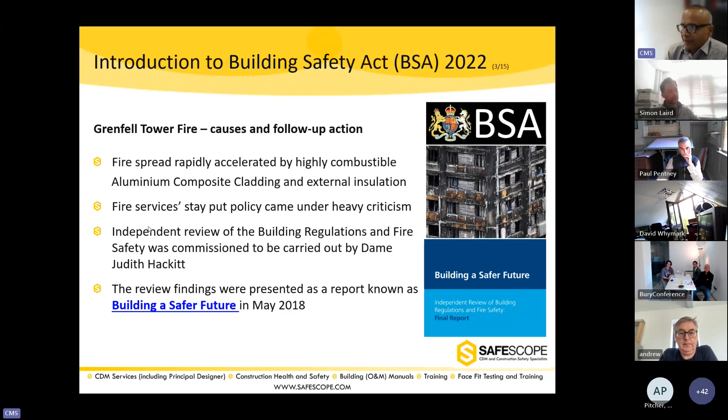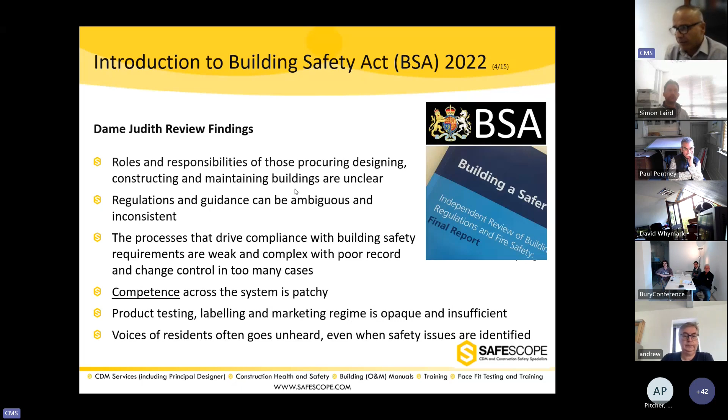The findings of the Hackitt review are important for us to understand, as all these new changes are based on them. She said roles and responsibilities of those procuring, designing, constructing and maintaining buildings are unclear - there's a problem in terms of who is doing what on the building project. Regulations and guidance can be ambiguous and inconsistent. The processes that drive compliance with building safety requirements are weak and complex, with poor record and change control in too many cases. Competence across the system is very patchy. Product labeling is opaque and insufficient. And for high-rise buildings, the voice of residents often goes unheard.

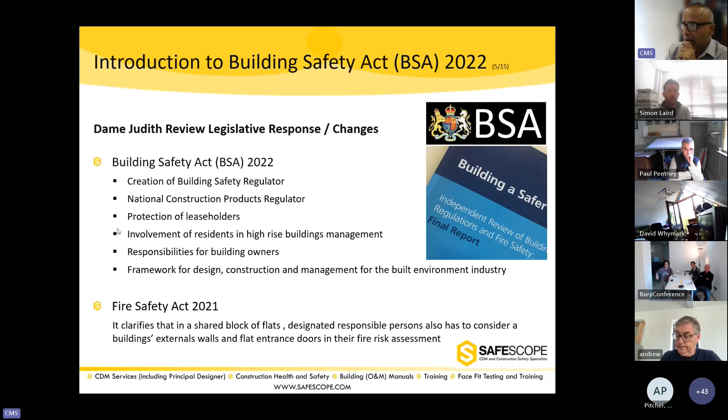There's a new Fire Safety Act 2021, which clarifies in shared blocks of flats who the designated person is. They are responsible for external walls and the flat entrance doors in their fire risk assessment. Now, it's a huge piece of legislation. We'll try to filter it down to the purpose, the new duties and roles, very quickly.

There have been changes to building regulations and creation of new roles and duty roles. There have been changes to construction products and creation of the National Construction Products Regulator, and changes to the Defective Premises Act as well. There are 6 parts to the regulation and 9 schedules.

Part 1 is the introduction. Part 2 is the regulator and functions, i.e. the building safety regulator. Part 3 brings changes, amends the Building Act 1984, and resultantly changes the building regulations as well, to do with the design and construction of building work. Part 4 is about high-rise buildings and the requirements in occupation. Part 5 of the Building Safety Act is about provisions for safety and standards.

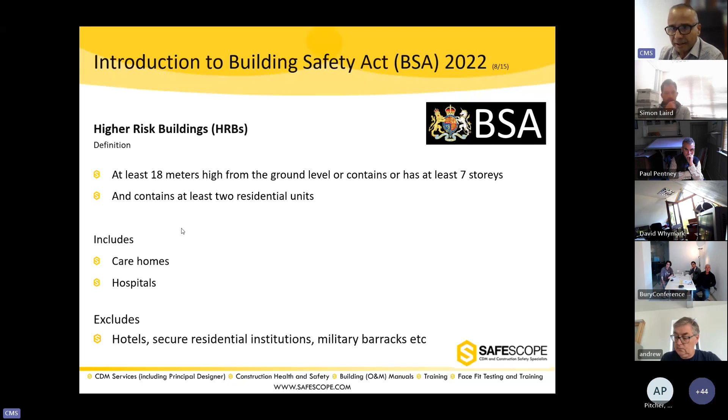It excludes hotels, secure residential institutions, military barracks, etc. So a purely commercial building without any residential unit will not be called a high-risk building, and these regulations which apply to high-risk buildings won't apply to it.

There are some diagrams showing how to measure 18 meters, measured from the lowest part of the ground floor if it's on sloping ground, to the last floor level — that's called the 18 meters. The basement floors are not included in the 18-meter measurement.

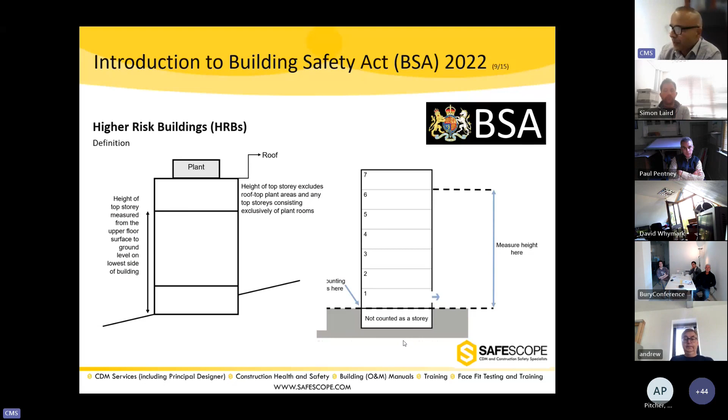Now, what the Building Safety Act does is create a number of different regulations. It creates the high-risk building regulations, description and supplementary provision, etc. I'm not going to go through the whole list, but it gives you an idea of how significant and huge the Building Safety Act is.

For example, the High-Risk Buildings Management of Safety Risks England Regulations, etc. And there's one down there that hasn't come into action yet, which we are expecting shortly.

It also modifies, which is more relevant to us, the Building Act 1984, which resultantly alters, amends and modifies the Building Regulations 2010. It also creates the Building Regulation Amendment Regulation 2023, which is very important for us because that's the one which will trigger all these new roles on building projects, and also creates the Higher Risk Building Procedures Regulation 2023.

The Building Safety Act also modifies the Regulatory Reform Fire Safety Order 2005, with some changes to it, and also creates the Fire Safety England Regulations 2022. You can imagine how many different sets of regulations have come out, changed, or been newly created as a result of the Building Safety Act.

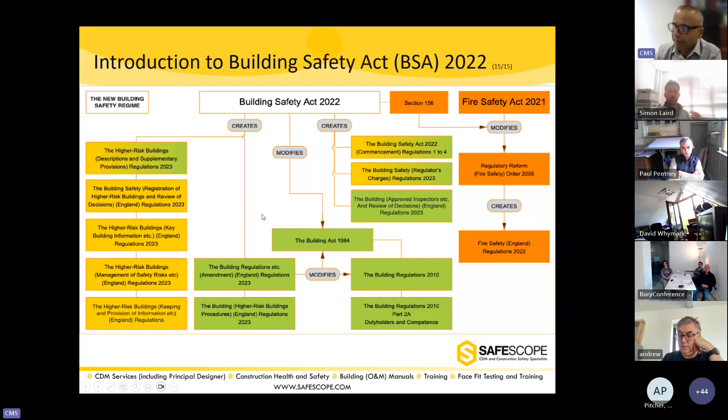Now, what are the new roles and duty holders that have come into place? Under the Building Safety Act, from 1st of October 2023 - a few days have already passed since last Sunday - new roles have been created: client, designers, principal designer, principal contractor, and contractors. Surprisingly, those are the same roles we already have under the CDM regulations. So effectively, they've created a new set of duty holders sitting parallel to the CDM regulations.

The client will now have duties under the Building Safety Act. Designers, all designers involved in a project, will have duties under the Building Safety Act. There's now a need to appoint a principal designer under the Building Safety Act as well. So there will be two principal designers - one under CDM regulations and one under the Building Safety Act, because they're two different things really. A principal contractor appointed under CDM 2015 will have those duties, but there's also another set of requirements on principal contractors under the Building Safety Act. Contractors will have duties under CDM regulation, but also now under the Building Safety Act.

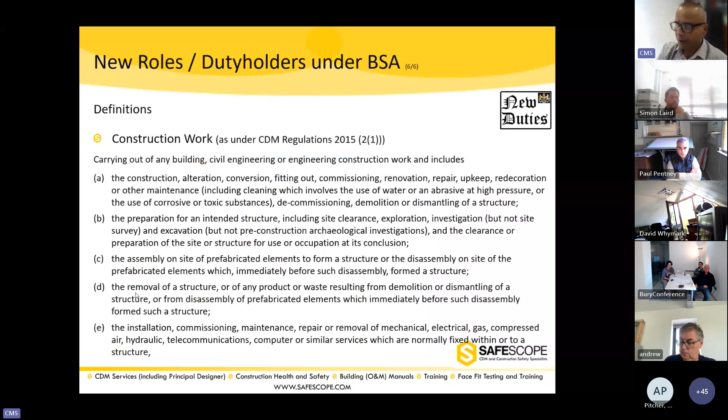So the requirements or the definitions are different, bear that in mind. That creates a difference as well. Now, what are the main requirements under the new rules? I hope I've cleared up the difference between the two. If there's any quick question on these differences, please let me know now. What I'm trying to say is to clearly map out how these two sets of regulations sit together.

The impression is that there will be a principal designer, and now they'll be looking after the Building Safety Act as well. It's not as simple as that. The roles are different, the focus is different, and the competency requirements are different. The definition is different. Where CDM may apply on a project, the Building Safety Act requirements may not apply - you see the difference, because the building work definition is narrower. Where building regulations or the Building Safety Act and the building regulations apply, CDM will apply, because CDM has a much broader definition. So if CDM applies to a project, it doesn't mean Building Safety Act requirements will apply. However, if Building Safety Act requirements apply to a project, then almost 99% of the time, CDM requirements will apply to that project as well.

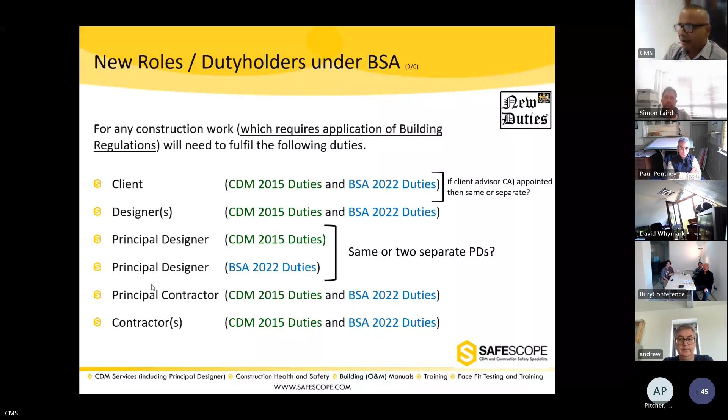Okay, is that okay? Can we move forward now? Yeah, I'll take it as a yes. Now, what are the main requirements under the Building Safety Act?

We'll go one by one, and I'll explain each a little bit later. I'll keep highlighting the words which are important for us to understand in order to decipher the Building Safety Act requirements. The Act applies to all building work - I'll keep using the word building work, not construction work, as there's a difference I explained. All building work projects, regardless of size and duration, including higher risk buildings which we defined earlier, now fall under these new requirements and will require the fulfillment of client, designer, principal contractor, and contractor duties. So any building work will have these duty holder roles applied to it, and I'll explain how they apply in different scenarios.

Principal designer and principal contractor appointments: all building work projects, regardless of size and duration, which involve more than one contractor - now you'll see the parallels with CDM. The way this has been structured is almost identical, I'm using the word almost, it's not exactly identical, but almost identical to CDM arrangements. So any project which involves more than one contractor will require the appointment of a principal designer and principal contractor by the client under the Building Safety Act, which is in parallel to, or in addition to, the CDM requirements.

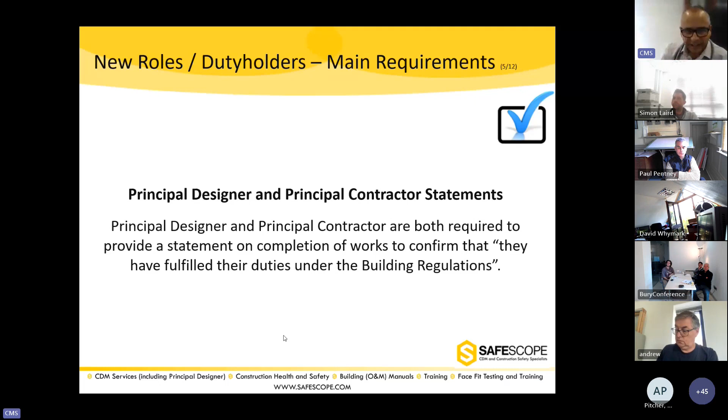Or to the client: Mr. Client, give us your evidence. How did you sign up a statement to say that all building work requirements, or building regulation requirements, have been completed? Show us how you've done it. And that would be very difficult now.

Now, domestic client projects - there are provisions on domestic client projects, and I'll come to that, including the definition of domestic client project, which is the same as under CDM regulations. Again, most, not all, of the client duties under the building regulations will pass on by default to the appointed principal contractor or the contractor.

There are similarities to CDM regulations. Under CDM, if it's a domestic client project, the client duties pass on to the principal contractor or the contractor, and all duties pass on. Under the building regulations, not all duties pass on. Most of them do, but there are still some duties that remain with that domestic client as well. Again, that's a change compared to CDM regulations.

So who are the domestic client? A domestic client is a client for whom a project is being carried out which is not in the course or furtherance of a business of that client, i.e. the work is being done purely for their own residential use or for their immediate family members. That's the definition used in CDM regulations, and the same definition applies to this regulation as well.

But again, bear in mind that not all duties pass on from the client. So the client still retains some of those duties in the case of a domestic client.

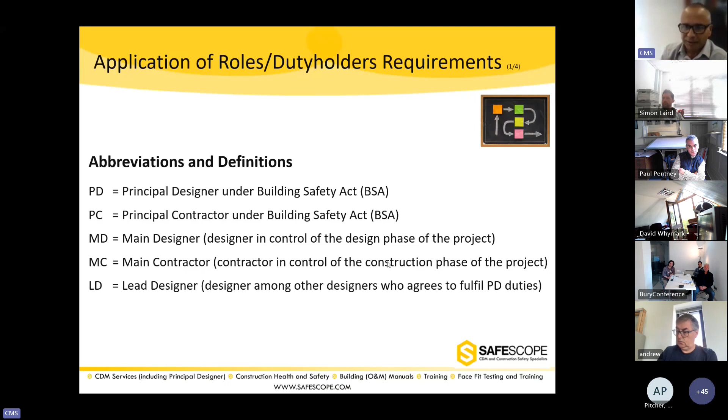There's a new term the regulations use, the lead designer. The lead designer, not under any contract or JCT, is a designer among other designers. So if a team of designers is sitting in design team meetings - architects, structural engineer, civil engineer, M&E, etc. - and among all the designers, if someone is brave enough to say, 'I'm happy to fulfill the duties of principal designer under Building Safety Act,' we call that person the lead designer. You can call him whatever you like, now that he's agreed to fulfill those duties. But the regulations use the term lead designer for a designer who has agreed to act or fulfill the duties of principal designer. You will see how this comes into play when I go into the flow diagram.

This is a flow diagram similar to the one we use for CDM regulations, with slight changes. I might have to reshare the slide or the flow diagram if you can't see it. So I will have to share it.

Guys, are you able to see any flow diagram? If you're not, let me know quickly so I can reshare it. Can you see any flow diagram appearing on your screen? You can see it, but it's very small. Okay, can you see it now? It should be a big flow diagram with Safescope written on top of it. Yeah? Okay, let's go through it.

This is quite important. I need your attention, all of you, because this is quite important to understand. If we go through this flow diagram, hopefully I can clarify things much better, and hopefully it will make the situation more obvious on any scenario.

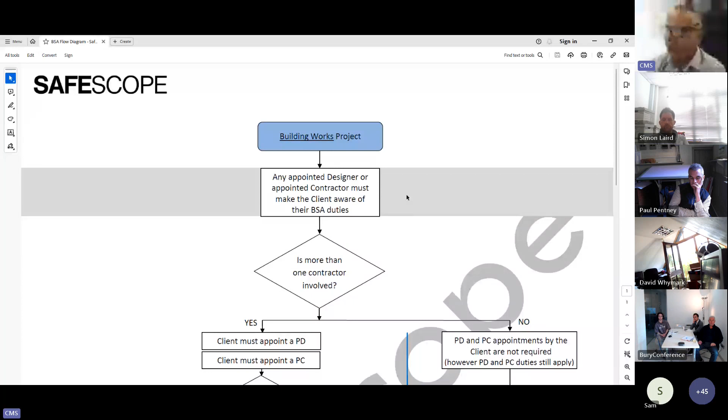Let's start on top with the blue box, the building works project. Again, I'm using the word building works, not construction works, because as we said, they're two different things. Building works starts, or initiates. What is to happen under this Building Safety Act new requirements is that any appointed designer or appointed contractor must make the client aware of their duties under the Building Safety Act as a first requirement.

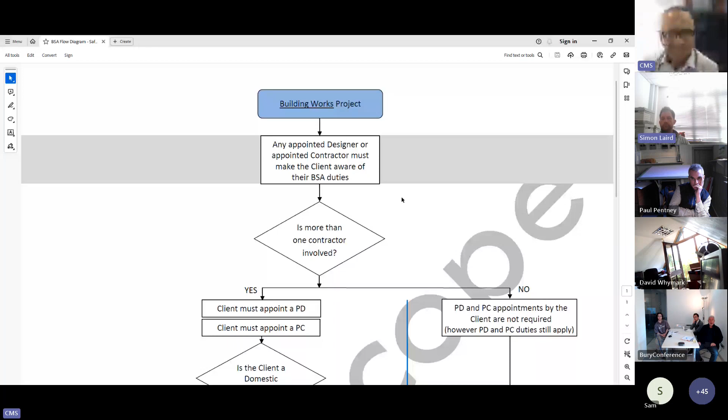Let's move forward. We have to ask ourselves a question: is more than one contractor involved in a project? Let's say no, at the moment we're saying there's only one contractor. Let's quickly run through the scenarios on our right-hand side. So no - if there's only one contractor, the client is not required to formally appoint a PD or PC, which is fine, similar to CDM regulations. But there's, however...

However, PD and PC duties still apply. So the client doesn't have to appoint it, but the duties fall onto other people. So even in a case where it's only one contractor, no matter how small the work is, if it's building work where building regulations apply, the PD and PC duties will always apply. Whereas if it's one contractor, the client doesn't have to make a formal appointment. I'll probably end up confusing you quite a lot here, and you have to ask me questions to clarify. But I'll explain a bit further as we go down, and hopefully it will make sense. If it doesn't, please shout.

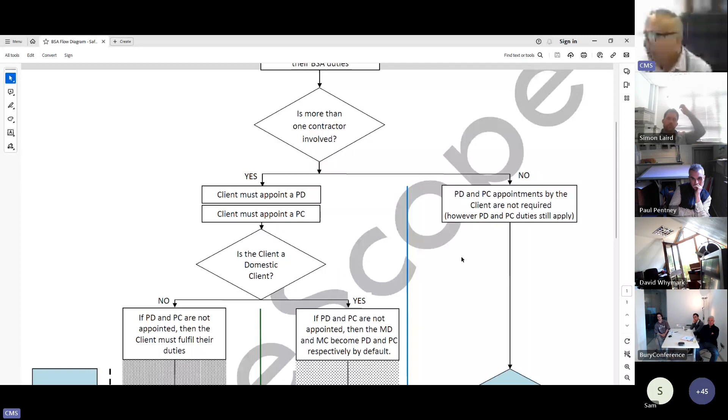So what happens next? Now I'm going to jump in to see how the duties will work, and I'm going to bring all those duties here in front of me. Let's follow with the client duties in blue, or whatever color you may define it. Now in bold it says client duties from the left. I'm going to go into that last scenario.

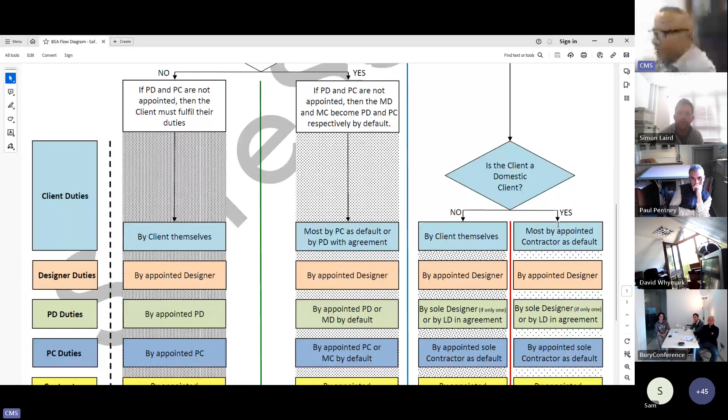Now again, we have to ask a question. Going back, we are on the right-hand side - we've answered that more than one contractor is not involved, we say no, so the client doesn't have to appoint PD and PC. What happens next? We have to ask ourselves: is the client a domestic client? Let's go through and say yes, it's a domestic client.

What happens? We're now on the extreme right-hand side, to the right of the red vertical line. Please follow me here. Now, what happens to client duties? The client duties pass on by default, most of them, to the appointed contractor, as we said previously. Most of them, not all of them. The client will still have some duties, which I'll explain.

Now, what happens to designer duties? By the appointed designer. Whoever is designer appointed, they will have to fulfill those duties.

Now, what happens to PD duties? That's where it gets complicated. The client doesn't have to make formal appointments of PD and PC, but the duties still apply. And if there is one designer only, then principal designer duties fall onto that sole designer. They have to fulfill those principal designer duties.

However, if there is more than one designer involved, those designers have to agree between them who will act as principal designer, and that agreement has to be in writing, and then they have to inform the client about it. That person who has volunteered to become principal designer, or fulfill the principal designer duties, would be called the lead designer.

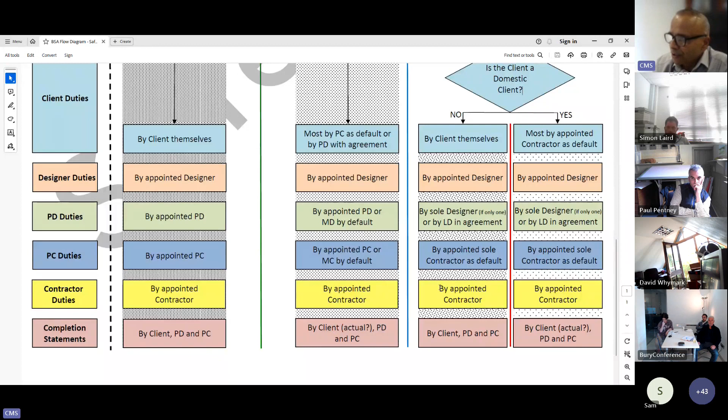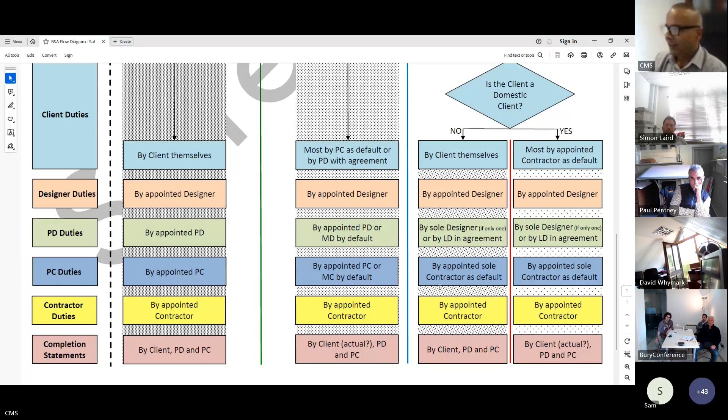Guys, that's the situation where we have one contractor involved. So I went through the columns to the right of the red line and the column between the blue and red line. Are we clear on that? I think we're clear as mud really on this situation, because it doesn't make much sense on occasion. But I'm going to move on now.

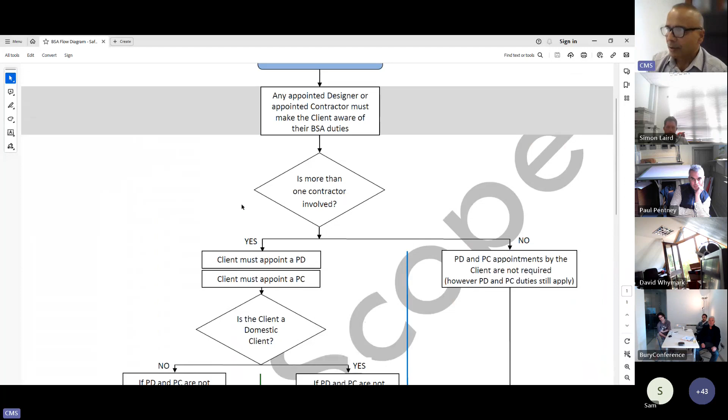I'm going to talk about the project where there's more than one contractor involved. So we're going to ask the question again: is more than one contractor involved in that building work? This time we're saying yes, there's more than one contractor involved.

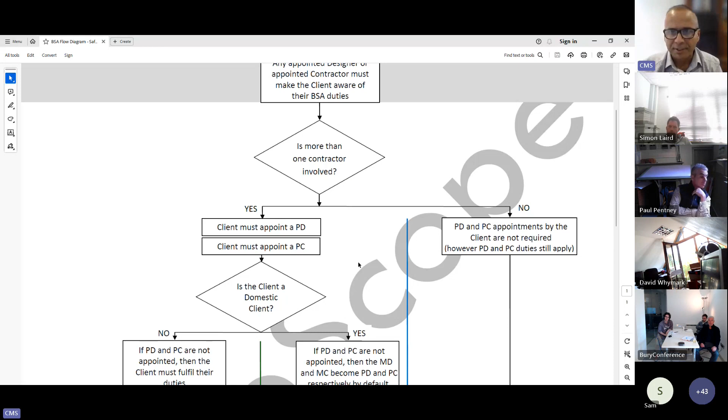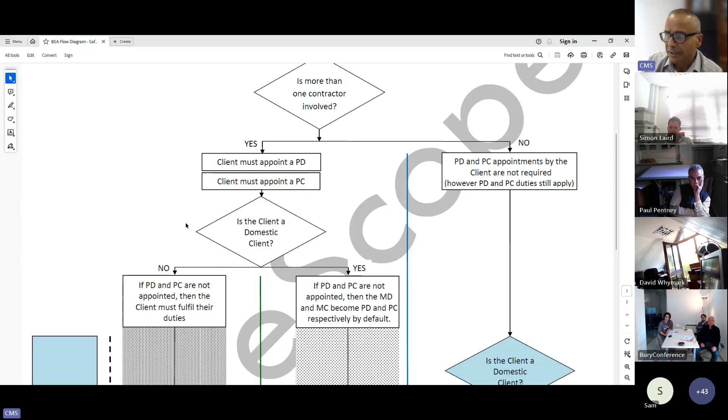What happens? Same as in CDM regulations, the client must appoint a principal designer. The client must appoint a principal contractor in this case, which is fine. But what happens if the client is a domestic client, or it's a domestic client project situation? Okay, let's see what happens.

Let's ask another question, right at the top of the screen: is the client a domestic client? Let's say yes. So now we are in the column between the green and blue line, right guys? Now, if the client doesn't appoint PD and PC in this situation, because it's a domestic client and it's more than one contractor, then the main designer and the main contractor become PD and PC by default.

Same as in the CDM regulations. The main designer is the one who is in control of the design phase, and the main contractor is the one who is in control of the construction phase, and they become PD and PC by default.

Okay, now let's talk about the duties. What happens to the client duties in this case? So guys, again I'll repeat, I'm talking in between the green line and the blue line. So what's happening to the client duties? Mostly they will pass on to the principal contractor by default.

But the regulations also give another provision that PD could agree in writing to say they are willing to fulfill those duties, which again, as in CDM regulation, there's a similar sort of provision, but I haven't heard of any case where PD has agreed that they will fulfill client duties. Similarly here, I don't expect that any PD would agree to fulfill the client duties in this case, so they will pass on by default to the principal contractor.

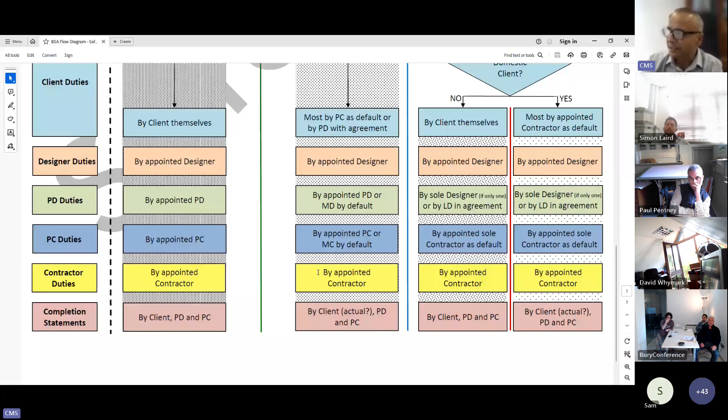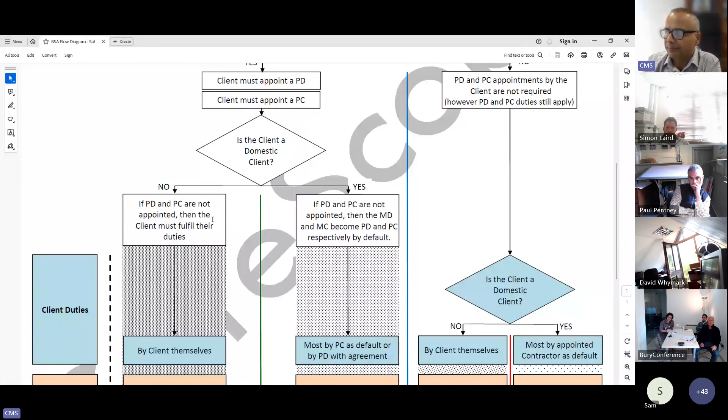I'll also color code the background differently in each scenario, so you can see which scenario I'm talking about. Now we're coming to the last scenario, to the left of the green line. We're asking the question again: is the client a domestic client? And now we're saying no, they are not a domestic client. And where most of our projects or building work may fall, where we have a non-domestic project situation and more than one contractor.

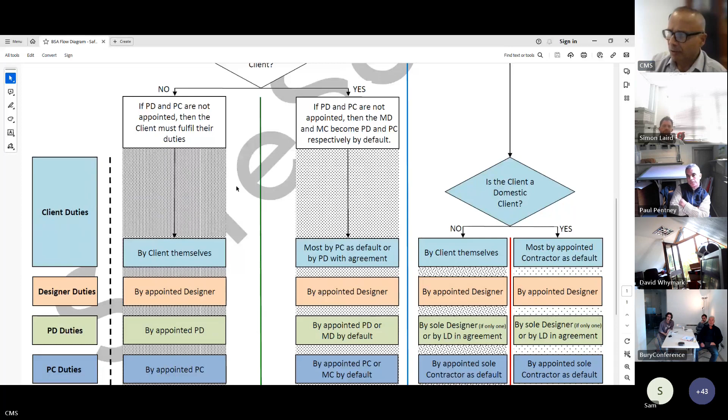Now what happens is that if PD and PC are not appointed by the client, then the client must fulfill their duties, same as in CDM regulation. So let's see what happens to those duties. Again, we are on the left-hand side of the green line. Client duties will be fulfilled by the client themselves or by their advisor, whatever the case may be. Designer duties by appointed designers, or designer if it's only one designer. Who will fulfill PD duties? By the appointed principal designer. PC duties by the appointed principal contractor. Contractor duties by the appointed contractor. And the completion statement will be given by the client, PD, and PC. There's no change there. So that's the situation when it is a non-domestic and more than one client situation.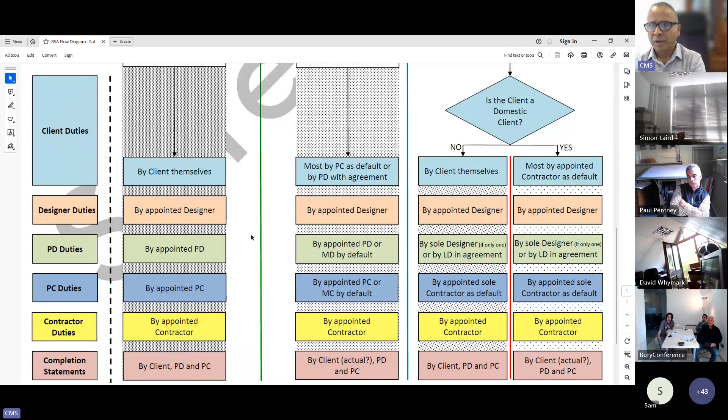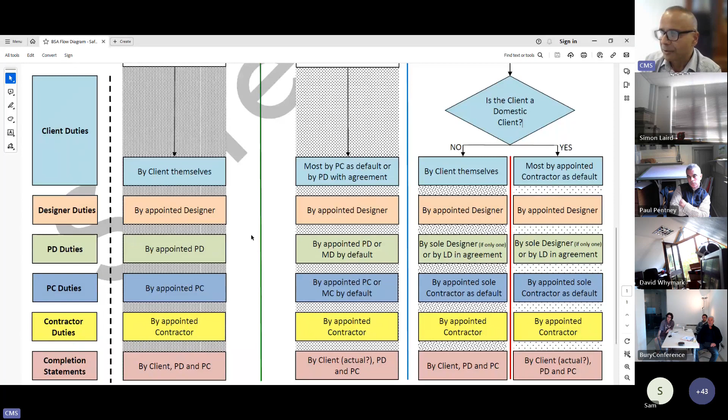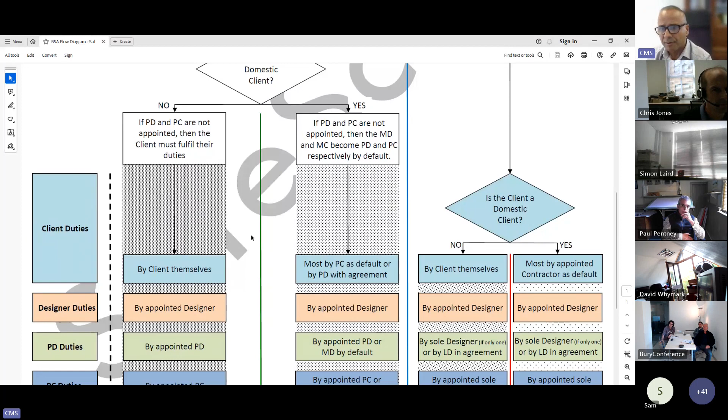Guys, after a few minutes we'll take a quick break. If you bear with me, I'll just go through this application. It's quite important that we understand this, and then we can take a quick break for tea or to go to the loo. And this is the way the regulations will apply, that's the flow diagram. I hope this makes sense, how the different requirements will apply. Please remember, this is not exactly the same as the CDM regulation. There are changes, the requirements are different. We need to really understand the difference between the two. Okay, are we good with this flow diagram?

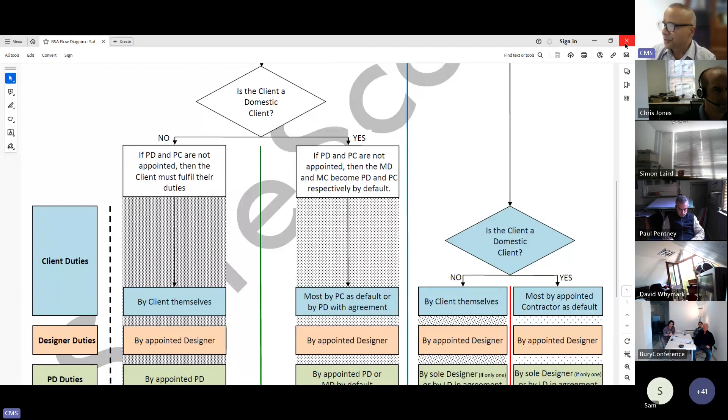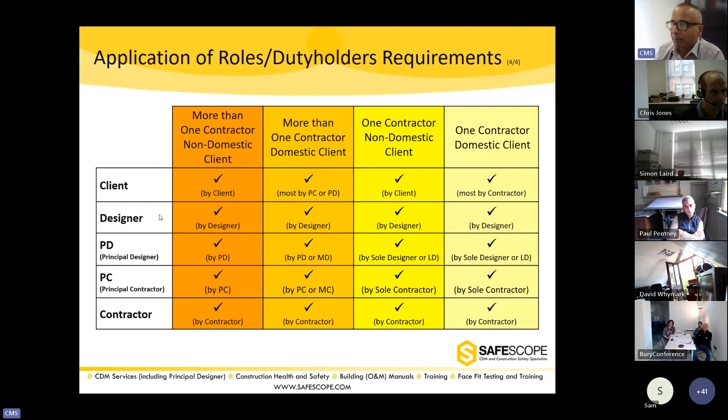Unless there's any quick question, I'll just continue. So hopefully you can see my slide now with a very small flow diagram - it has shrunk. So in a tabular form, we've put the same flow diagram in a table that just shows how the duties will apply in those 4 scenarios, how the different duties will apply in those 4 scenarios. Each one has been written - it's exactly the same, just an extract from the flow diagram in a tabular form. The next one is exactly the same, but it highlights the scenarios, what happens in each scenario, and who does what really in those scenarios. And that's the way the regulations will apply from 1st of October, which has already happened.

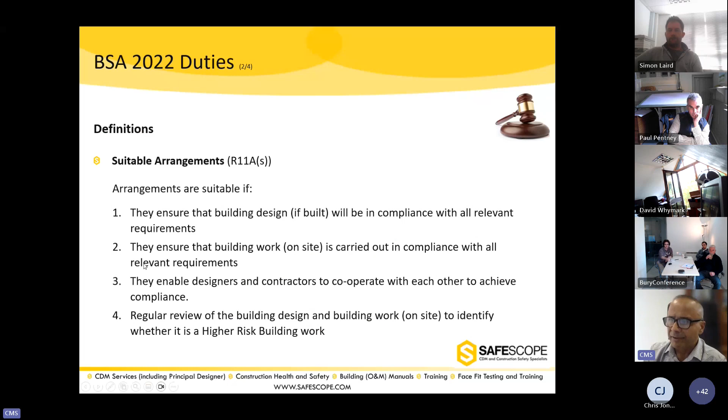So those are the suitable arrangements, by definition. So what are the relevant requirements? The relevant requirements are these duties under the building regulations - Regulation 4, Regulation 6, and also Schedule 1. When we say Schedule 1, it automatically means all approved documents, because Schedule 1 is about approved documents, and all approved documents become relevant requirements. So it's quite vast and extensive when we talk about all the relevant requirements, and they are all about the building regulations.

There's also another term used: building information. What is the building information? Again, the regulations gave us the definition. The building information means information in the client's possession or which could be reasonably obtainable. This includes information about the work, the planning and management of the project, the issues relating to compliance with any other relevant requirements, and how they were addressed. This sounds to me more like a PCI, or pre-construction information, the one produced under CDM regulation, but it's not as extensive. For PCI, there's a proper schedule given for what should be included, whereas here it's described in few words, but the intent behind it appears to be the same.

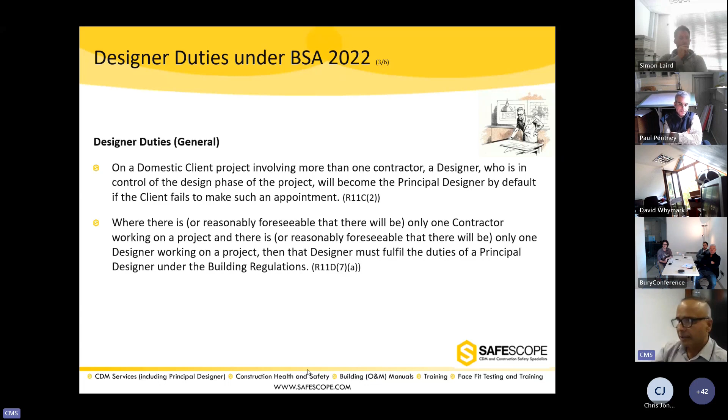Now, I think we covered that already as well. A designer must take all reasonable steps to ensure the design work carried out by them, and by any workers under their control, is planned, managed, and monitored. Whereas in CDM regulations that requirement is only on two parties—the principal designer responsible for planning, managing, and monitoring the design phase, and the principal contractor responsible for planning, managing, and monitoring the construction phase.

Now, the requirement for planning, managing, and monitoring spreads throughout all duty holders, from client, designer, principal contractor, to contractor. That's a change—an extension of those duties, and the duties have been expanded. They must have those planning, management, and monitoring arrangements in place, so that the design is such that if the building work is carried out accordingly, it would be in compliance, i.e. the design complies with all relevant requirements of building regulations.

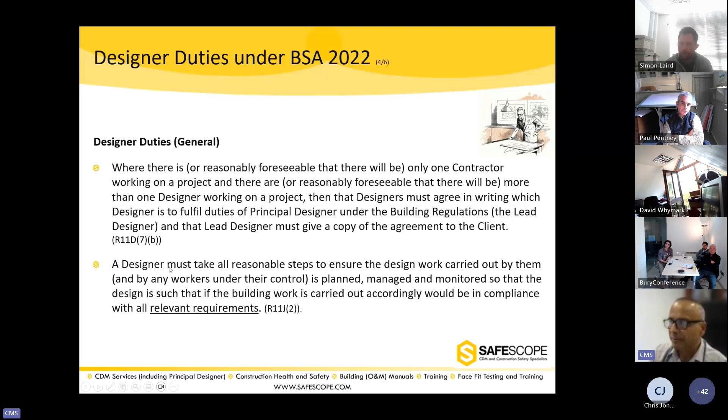A designer must cooperate with other people involved, which is given. Now, what are those additional duties?

A designer must not start design work unless satisfied the client is aware of those duties under the BSA. A designer must take all reasonable steps to ensure that the design complies with all relevant requirements.

A designer must take all reasonable steps to provide sufficient information about the design, construction, and maintenance of the building to assist the client, other designers, and contractors to comply with all relevant requirements. So they have to be very, very specific about the products they specify, etc. Instead of putting a placeholder saying that needs to be designed by someone else, they have to be very specific about their requirements.

Where a designer is carrying out only part of the design of the building work which comprises the project, the designer must consider the other design work which directly relates to their building work and report any concerns as to compliance with all relevant requirements to the principal designer. Now, that's quite scary to think what that means. It means that if they are designing a certain part of the work, and if they see other design work by other designers around them, and if they have any concern over that design work, they must report it to the principal designer. Now that puts the onus, the responsibility on a designer that if they see any problem, they must notify the principal designer.

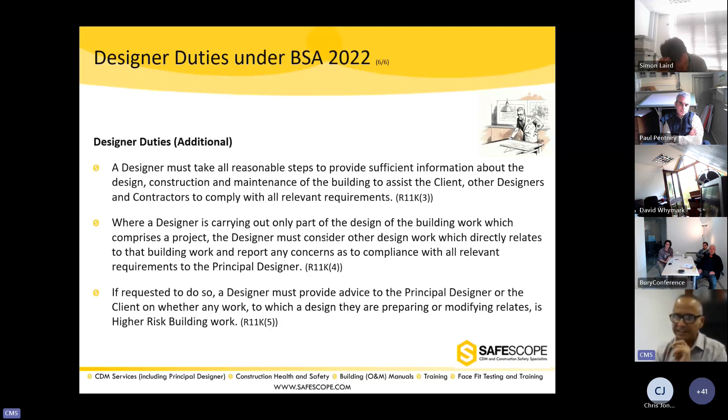So those are the duties of a designer under these regulations, which are not so different to CDM. However, the scope is different, but obviously there are some thorns and some stings really in these regulations to be careful with. Now, what are the principal designer duties?

We touched on it, but I'll go into a little bit more detail. A principal designer - who's a principal designer? He or she, a designer who is in control of the design phase of the project. Okay, competence - again, the acronym SKEB will come into play: skill, knowledge, experience, and attitude/behaviors.

Principal designer must take all reasonable steps to satisfy that any appointments they make are competent. In relation to higher risk work, if they make any appointment, like a designer, they must give all the records to the client and ensure that the appointee has the necessary competence.

A principal designer must be competent, obviously - that goes without saying, really, that they have to have the necessary competence to accept the responsibility. Where a principal designer is not an individual, so if it's an organization, they must designate, must name the person with necessary competency to identify that that's the person who will be taking on the role of a principal designer.

A principal designer must not accept the appointment if they are not competent. Now, where at any time a principal designer thinks this is going beyond my competency range, they must immediately pull out and inform the client to say, look, we are not competent anymore. And then the client is required really to make another appointment for a principal designer.

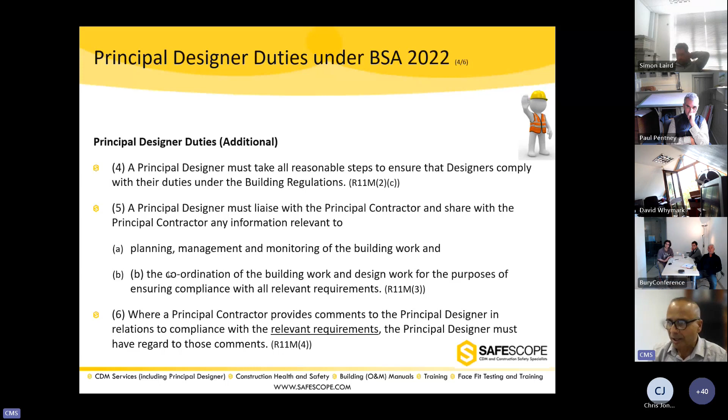So that's a strange duty: if the principal contractor says, by the way, here's a problem with the building regulation, the principal designer must consider that, must give it regard really. They can't ignore it. They have to acknowledge it and do something about it.

A principal designer, if requested, assists the client in providing information, i.e. building information. I think it goes without saying that the principal designer will provide the building information to other designers and contractors.

A principal designer, when their appointment ends during the project, within a month, no later than 28 days, must give a record to the client to say what steps they took to fulfill their duties. That's quite interesting because it's saying principal designers can't just walk away from the project. When you walk away, you have to give a record of what you did on the project to the client.

So then the client appoints another person. What this seems to suggest is that there would always be a need for a principal designer on the project, as required under the building regulations where applicable.

Now, when the next principal designer comes in to replace the previous one, the new principal designer must review all the documentation provided by the previous principal designer to ensure the design is compliant with all relevant requirements. That's a problem, because if the previous principal designer didn't do anything or didn't do it properly, then the replacement taking on the role has to ensure everything is up to scratch at that point.

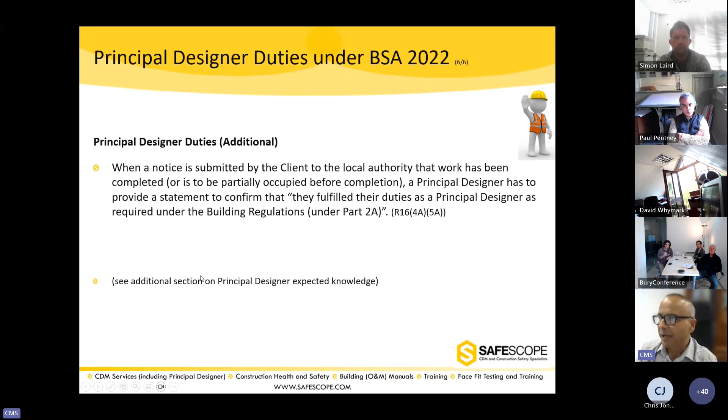There's more about the expected knowledge, I'll quickly come to that. I'm going to rush through it, I know that we're a little tight on time.

A principal contractor, who is a principal contractor? They are the contractor in control of the construction phase of the project. Principal contractor duties on competence are similar to principal designer and designer. They must have the necessary skills, knowledge, experience, behaviors and organizational capability.

Again, in relation to high risk work, if any principal contractor makes further appointments of contractors, they must give a record to the client, and the client must keep it safe.

A principal contractor must be competent, goes without saying. A principal contractor must not accept an appointment to act as a principal contractor if they are not competent, if they cannot fulfill the competency requirements.

And where at any point the principal contractor ceases to be competent, where they think that's beyond them, they must notify the client to that effect.

Any person carrying out work or building work must ensure that it is planned, managed, and monitored. Any person carrying out building work must cooperate with other people involved in the project.

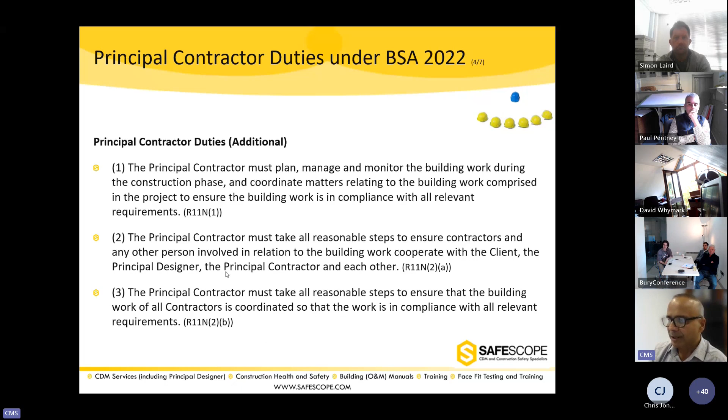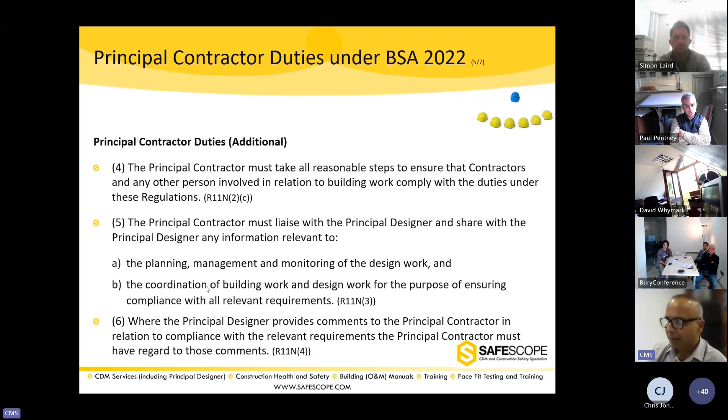The principal contractor must take all reasonable steps to ensure contractors and other people involved in the building work are cooperating. The principal contractor must ensure that the work is coordinated among the contractors. The principal contractor must take reasonable steps to ensure everyone involved in the building work is complying with their duties under these regulations. The principal contractor must liaise with the principal designer and share information about the planning, managing, and monitoring.

Now, what shape that information will take needs to be seen - whether that will be included as part of the construction phase plan. Again, that's probably the wrong approach because this won't apply to every project that CDM applies to, but we'll see. Now, a reciprocal arrangement: the provision is that where the principal designer is commenting on the principal contractor's work, the principal contractor must have regard to those comments.

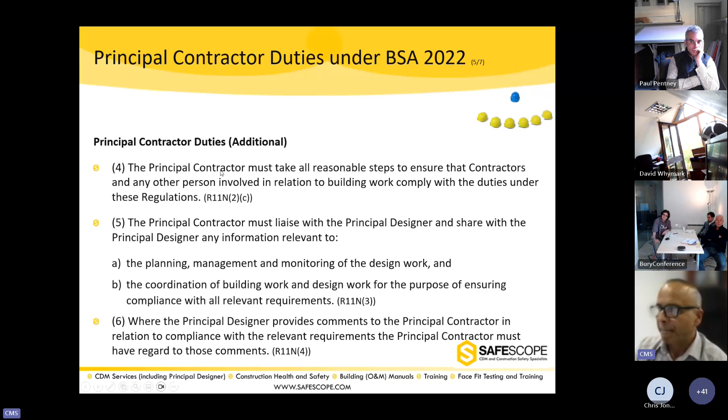The principal contractor must, if requested, assist the client in providing building information to other designers and contractors. A principal contractor must, when their appointment ends, no later than - so if a principal contractor is gone from the equation halfway through the job - within 28 days, give the client all the information back to show how they complied with these duties, giving the full record to the client.

And when the new principal contractor comes in, they have to check to ensure the record the previous principal contractor gave was good enough, or if it's not compliant with all relevant requirements, or if it is, whatever the case may be. And the principal contractor must give a statement when the work is completed to say that they have fulfilled their duties as principal contractor under the building regulations.

Now, what are the contractor duties? This is the last bit on the duties. I'll quickly run through it. Contractor means any person, including a client, but not a domestic client - a domestic client is not a contractor because they're not doing it for business. Anyone who, in the course of a business, carries out, manages, or controls any building work is called a contractor.

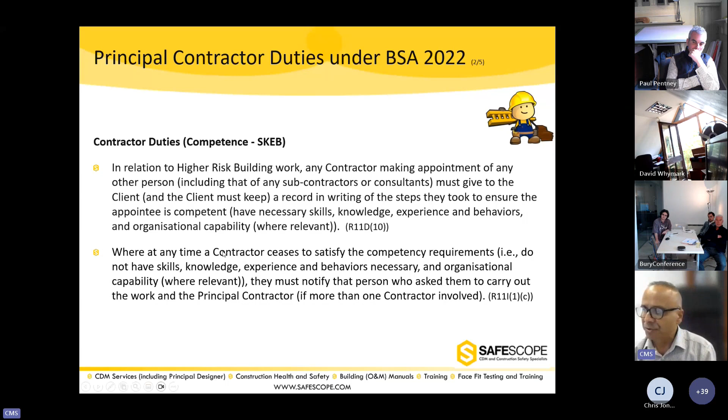They must not, if they're not competent, accept the appointment as a contractor. A contractor must take reasonable steps to ensure that they themselves are competent in relation to high-risk building work. Whatever further appointments they make, they must give a record to the client. And as with other duty holders, if they are not competent anymore for the work, they must notify that straight away to the principal contractor.

On a domestic client project, if they are the only contractor, they must become the principal contractor and perform those duties. On a one-contractor job, the contractor would also be treated as fulfilling the principal contractor duties, also looking after the client duties as well. And a contractor must take all reasonable steps to ensure the building work carried out by them is planned, managed, and monitored so that it's in compliance.

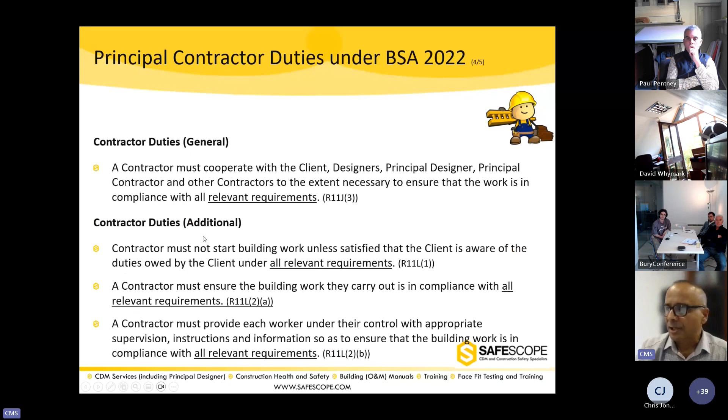A contractor must cooperate with others. Now, there are some other duties quickly: a contractor must not start work unless satisfied the client is aware of their duties. A contractor must ensure the building work they're carrying out is compliant with the building regulations. So this requirement goes on to every duty holder.

A contractor must provide each worker under their control appropriate supervision, instruction, and information so as to ensure the building regulations are complied with. In addition, in relation to building work, a contractor must take reasonable steps to ensure information about the work is provided to assist the client and other contractors to comply - so sufficient information is provided to other parties for their work. This is especially relevant where there's a golden thread of information required from the principal contractor and contractor.

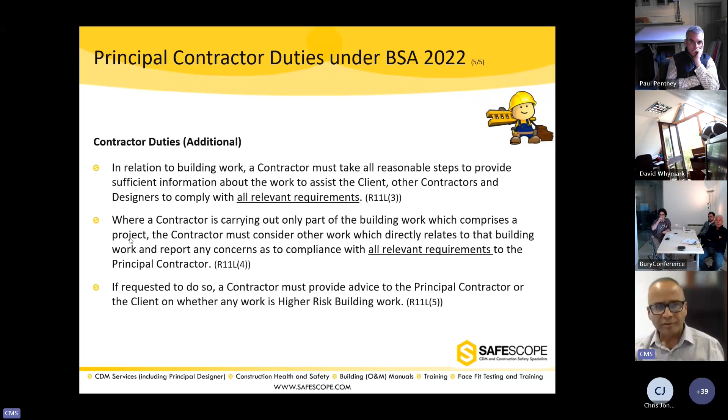And where a contractor is carrying out only part of the building work which comprises a project - that's again very important to understand - the contractor must consider the other work which is directly related to their building work, and report any concerns as to compliance. So if they think that the building work around them is not compliant with the building regulations, they must inform the principal contractor.

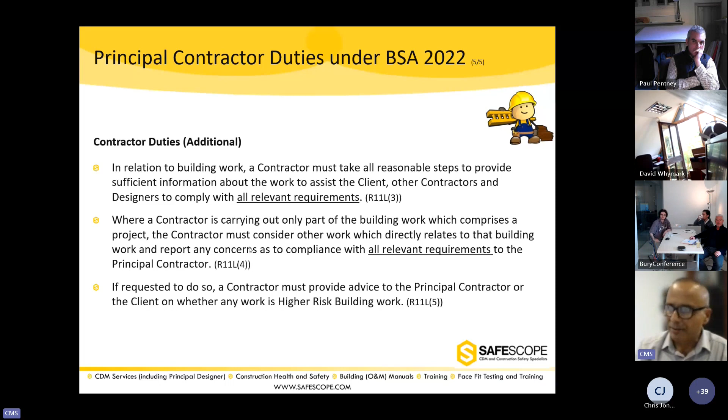Now that is again a very scary thought, really, how that will work and how contractors will be raising concerns about other contractors. Now, if requested to do so, the contractor must provide advice to the principal contractor or client on whether their work will be high-risk work, which is probably further down the chain.

Okay, so these are the duties, guys, under the building regulations. Now we'll quickly finish the remaining slides very quickly. Now, what is the expected knowledge of a principal designer?

There's a question. Can an existing CDM principal designer with knowledge of CDM regulations and other construction health and safety related legislation fulfill the competency requirements and duties of a principal designer under BSA? Can they do it? Someone shout and say yes, no, whatever. There's no right answer really, I'm not checking, just to get me started. Can they just take on the role of a principal designer under BSA?

The answer would be no, because as we said, the focus of these regulations is different. As long as they are competent, they understand the Building Safety Act, they understand the building regulations, etc., and they fulfill those requirements, they can take on both roles.

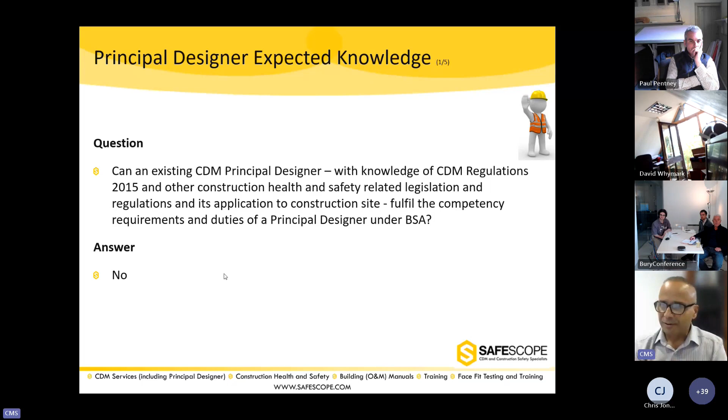However, HSE expects the same person or organization who is taking on the principal designer role under CDM should carry on this role. Not necessarily, but there's an expectation that they should, as long as the competency requirements and organizational capability requirements can be met. So obviously not every principal designer can take on both roles. They have to be an organization which can satisfy both sets of competency requirements.

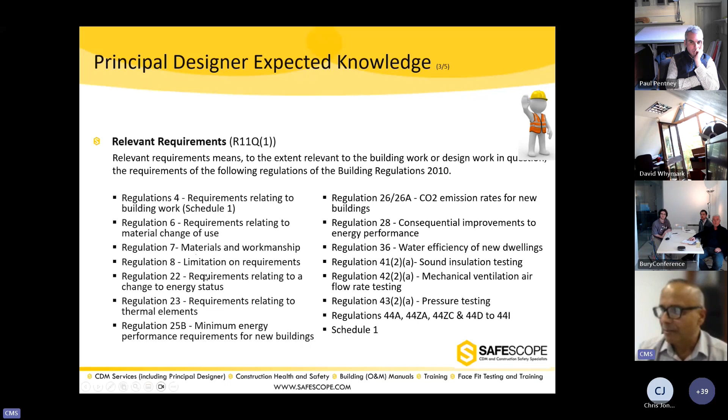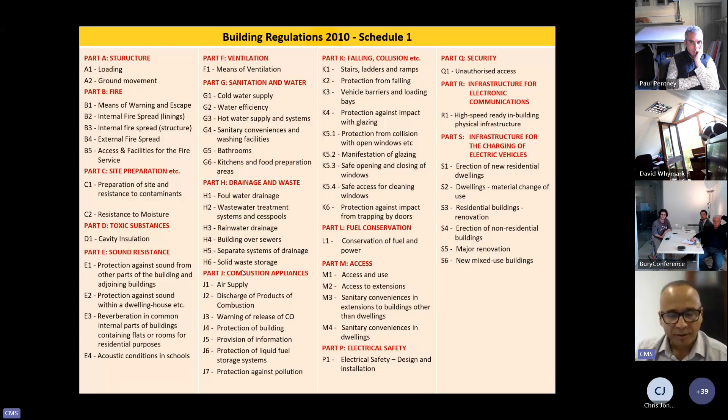Now, what are the relevant requirements? That's what the principal designer needs to know, all the relevant requirements under the building regulations and Schedule 1. That's Schedule 1, which is all the approved documents under the Building Safety, Building Regulations 2010. The principal designer needs to understand what those approved documents are and how they are to be implemented.

Now, someone went on the APS, Association for Project Safety, and mapped out what a principal designer needs to know under the Building Safety Act. They came up with 54 documents and about 649 different codes and standards that they are expected to have a workable understanding of, not a thorough knowledge of every bit of it - at least a workable knowledge of all those regulations, standards and codes.

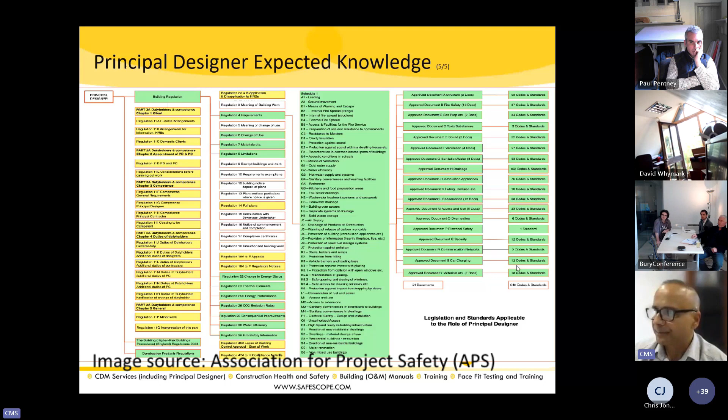Okay, competency criteria. There are other documents that have come out from British Standards - there's a core competency criteria. You may have come across PAS 8670. There is one for the principal designer, called PAS 8671, and there's one for principal contractors as well, which is 8672. These competency criteria standards are written specifically for these roles, not for CDM, but for these roles.

Now, the RIBA are initiating a register for principal designers so the principal designer can demonstrate competency for both CDM 2015 and Building Safety Act 2022. It's also expected, importantly, that the SSIP certification, i.e. CHAS, SMAS, etc., will change as well, because now they have to show their registration includes the requirements of the Building Safety Act as well. So there will have changes coming in the pipeline for all these different requirements under CHAS, SMAS and all the SSIP accreditation member requirements.

What are the transitional arrangements in place? These new roles and duty holders do not apply if the building work has already started before 1st of October. One may argue, what does the term 'started' mean?

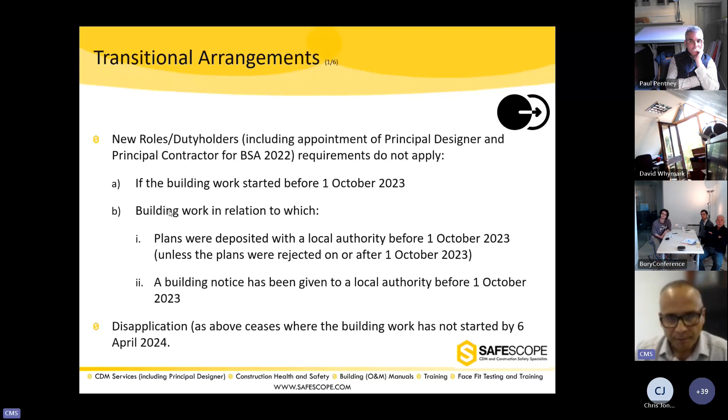They should make these appointments. So what determines the work is started? There are a number of different definitions. You can pick and choose, really.

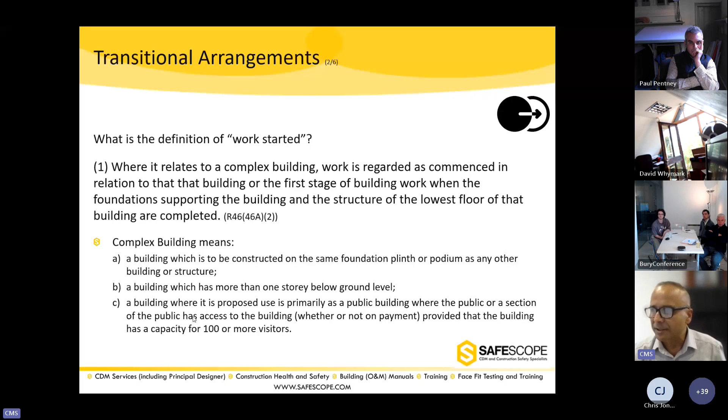Where's it a complex work, or the first stage of a complex work, then the foundation supporting the building and the structure of the lowest floor of the building are completed, then the work is started. A complex building means one which is to be constructed on the same foundation, plinth or podium as any other building, a building which is more than one story below ground level, or a building which is a public building serving 100 visitors. Where the work consists of construction of a building which is not complex, or a horizontal extension of the building, the work is to be regarded as commenced or started when the subsurface structure of the building or the extension, including all foundations, any basement level, and the structure of the ground floor level is complete.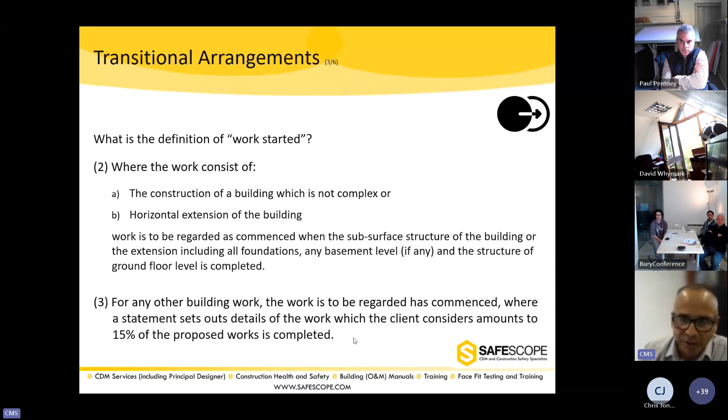For any other building work, the work is to be regarded as commenced where a statement setting out details of the work, which the client considers amounts to 15% of the proposed works, is completed. Then we say the work has started.

There are other definitions as well. Local Authority Building Control, LABC, have come up with their own definition, and the Department of Levelling Up, Housing and Communities have given definitions as well. There are slides out there showing the definition of where work has started. I'm not going to go into those details, but if you like, I can send them to you, or they're available on their website as well.

Okay, so that's it, guys.

I know it was a little bit intense to go through everything, and we needed these two hours really because there was a lot to cover. I hope we've done justice to this. Again, I haven't gone into depth on everything because there was a lot to cover, but just a quick snapshot, a quick understanding of where we stand in terms of these regulations, etc.

There are five questions that I'm going to ask all of us. Again, they're not to check our memories or whatnot, but just to have a quick understanding of what we got from this. So it gives me a measure of whether I communicated and conveyed everything in the way I was expecting to, but also gives you a little idea of whether you're at the right place in terms of your understanding, or whether you need to strengthen it anymore, etc.

But having said that, it's a huge topic. The Building Safety Act is huge, and to cover each and everything within two hours is almost impossible. Guys, even covering this in two hours, I have rushed through so many things really quickly, and my throat is just sort of disappearing as well.

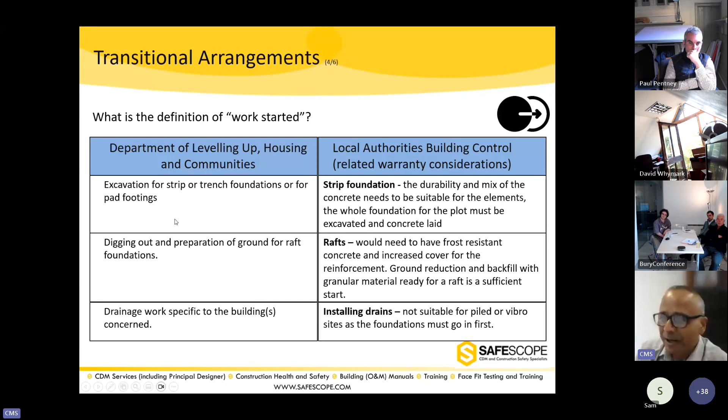Okay, before I take any questions, can I quickly run through these five questions? Please, can you just shout away the answer you have in mind? And again, I'm not judging anyone really, so just shout whatever you think.

Question 1: For each and every construction work where CDM principal designer and CDM principal contractor are appointed, it is now required to appoint a principal designer and principal contractor under Building Safety Act 22 as well. True or false? Shout away, guys. True, no, sorry, false. Anyone? It's false, because construction work is different to building work, isn't it? Correct, so it's a false statement. The BSA applies to building work, not construction work. So I'm trying to emphasize the definition, right?

Question 2: A principal designer appointed in writing for CDM 2015 is by default required to act as a principal designer under the Building Safety Act, because there cannot be two separate principal designers on a project. True or false? False, anyone? False, anyone for the true category, guys? No? Okay, you're right, it's a false statement, because for CDM you can't have more than one principal designer, but you can have two principal designers, one appointed under CDM, one under the Building Safety Act.